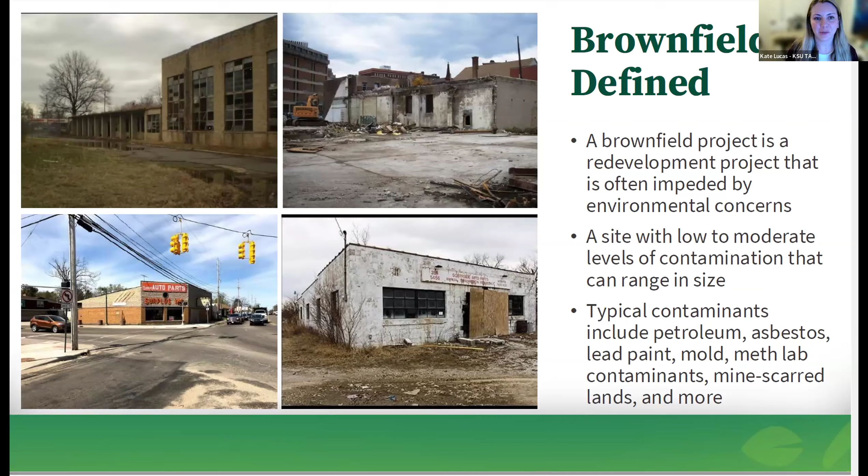So it's not a scary word. It's a word that really means there's potential for redevelopment and revitalization.

Okay, so just for the folks in the room or watching the recording who are not familiar with the project, we were asked to come and do some reuse visioning for the North Community Entrance Urban Renewal District, which was established a few years ago. It's 160 acres on the north end of Red Lodge. I'm sure you're all familiar.

This area was really identified as a focus area for the Urban Renewal District because it's a little bit underdeveloped, a little underutilized. There's a lot of businesses there that don't really provide an attractive and welcoming entrance to Red Lodge. The intent is to spruce it up a little bit and encourage redevelopment where feasible.

The 4 primary goals of the NCE URD, or as we may call it casually throughout this presentation, the URD, are to increase housing units near downtown, support business development, improve public infrastructure, and promote historic preservation and cohesive urban design identity.

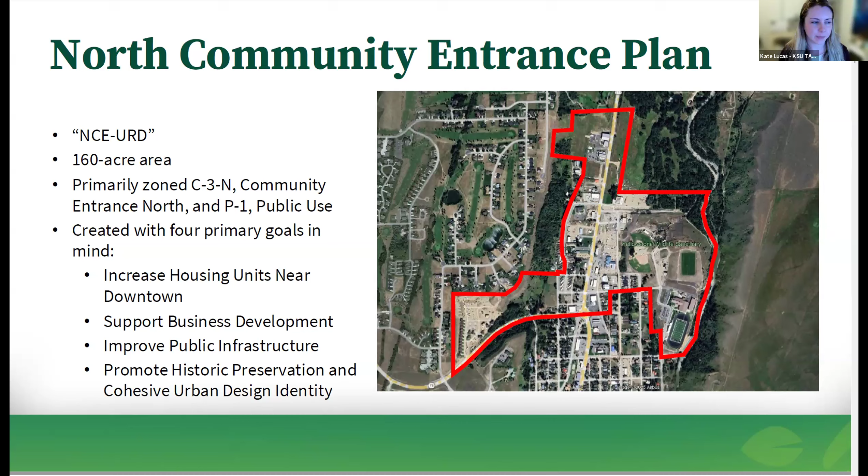Okay, so that's where we're working. Our scope of work is outlined here. We started out with some pretty robust community engagement, and I'll get into the results of that in a minute. We started out with an online survey that we published before we came and visited Red Lodge at the end of May.

Yes. Okay, great. So we came and did a site visit in Red Lodge at the end of May 2025, and we followed that up with what we called the Needs and Aspirations Survey.

And then we talked about doing some feedback on visioning. So far, we've not requested community-wide feedback in the form of a survey yet, but that is an option for us to do after we did this presentation here for City Council and the Planning Commission.

And the URA. So in addition to the community engagement, we also created a brownfields inventory and a site prioritization worksheet. Then Blake and a couple of his students worked on a package of redevelopment renderings that show potential for what could be developed within the URD, and he's going to go over those here in a minute. We also prepared a resource roadmap that identified different grant funding resources to help achieve the vision.

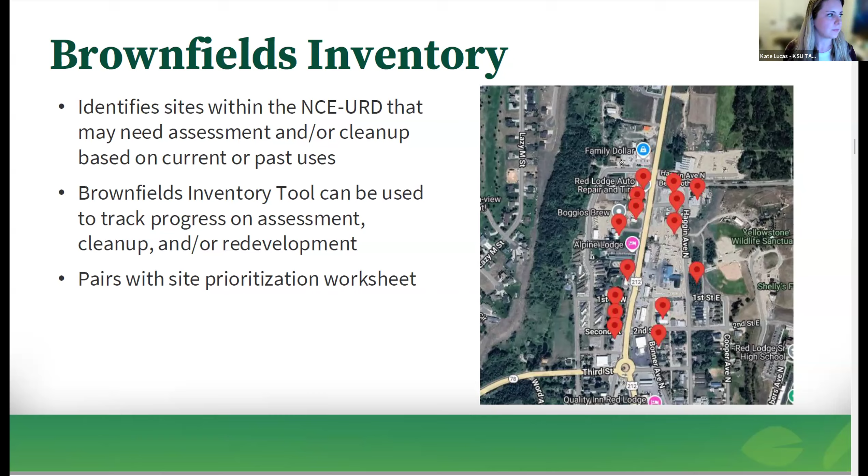In addition to the inventory, we just wrapped up the prioritization spreadsheet. This is available in the OneDrive link I sent out earlier today to the URA folks. I'm happy to share that again, and let me know if you have any issues accessing it.

This is a tool the URA can use to figure out which sites are best suited or highest priority for redevelopment. It's customizable—Maggie put together a sample—but theoretically, and in practice, certain sites end up with higher scores, indicating they're more ripe for redevelopment and could be pursued first.

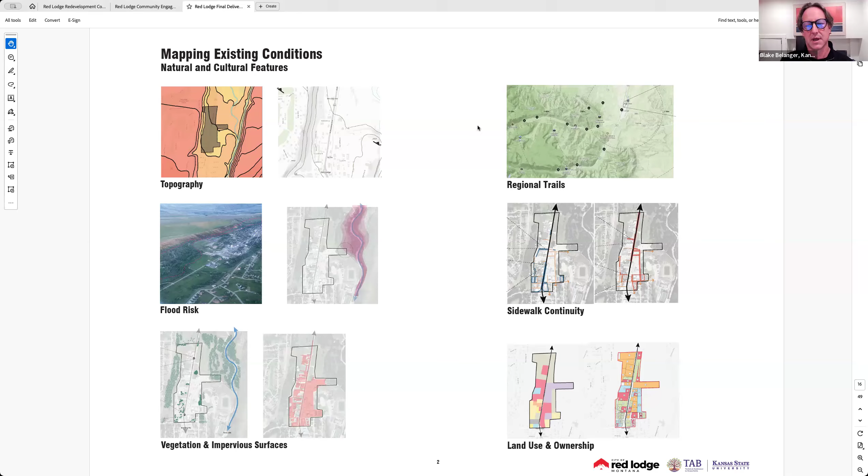From there, we identified with the URA areas that were the highest priority for redevelopment and other areas that were high potential for redevelopment. The criteria we used for that selection was city-owned property, so parcels already owned by the city, abandoned, vacant, or underused sites, industrial land uses, or parcels that are incongruent with the URD vision.

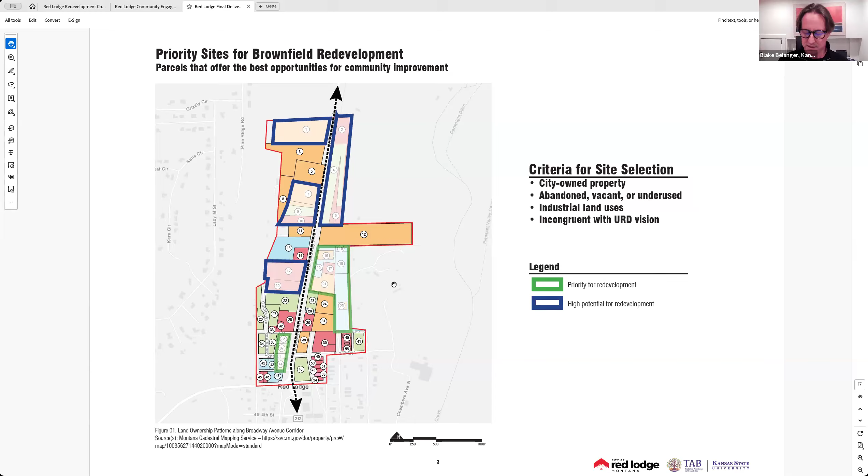And so we settled on actually 3 sites, 3 areas, the green areas as well as the blue. And from that, we moved into a slightly more nuanced site areas where we have 2 focus sites, the north site and the south site.

In this presentation, I'm going to start with the south site. It's less complicated and more straightforward. And then I'll go through the north site where there are 3 different options, and it's a more complicated set of conditions.

Throughout this presentation, there's a kind of dynamic that I'd like you all to keep in mind. When approaching urban design, it's important to begin with the concept of placemaking, which I'll talk about in a second. It's basically a people-centered approach to urban design.

In terms of the spatial dynamics of a site, there are 3 main components that need to be balanced: density, or amount of building space, number of housing units, the amount of development you're proposing; civic space or green space; and the circulation and parking required to support those uses. As one of those circles gets bigger, as you pick up more density, you need more parking, and those 2 conditions combined will shrink the green space.

If you want to increase the green space, then you have to shrink the parking, and that might affect how much density you can have. So at all times, when considering these 3 options, we were thinking about the dynamics of these 3 spatial considerations.

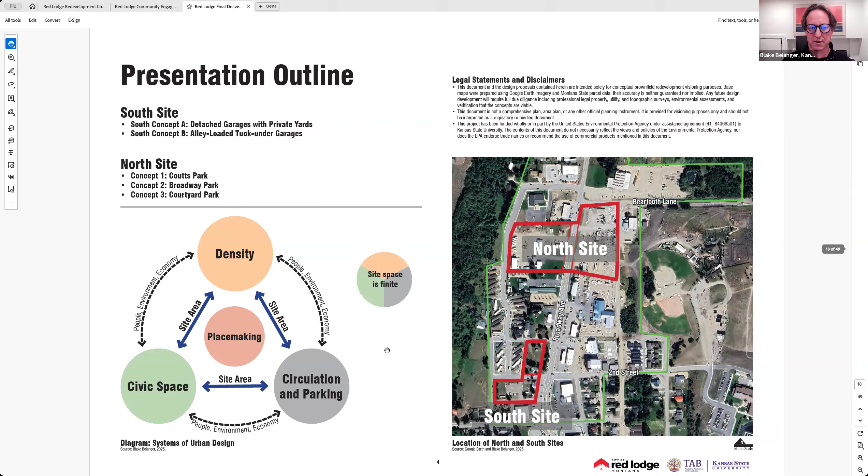So with all that in mind, placemaking strategies in Red Lodge—like I said, it's a people-centered approach to designing public space that really focuses on human comfort, sociability, creating vibrant places that are accessible to people.

It recognizes that the public realm or civic space is kind of the heart of communities, the heart of neighborhoods. And when I say public realm, I'm including things like streets, parks, plazas, squares, any place owned by the public where people can interact freely and go about their day.

There has been a focus on that in all of these concepts—these are not just concepts trying to maximize all of the development potential, but there's a consideration, there's a balance. There's density, but there's always going to be some consideration of the public realm and placemaking in this.

Some of the opportunities for placemaking that we identified, you can see on this slide. We thought the concrete batch plant tower was a very interesting structure that could potentially be reused as some kind of iconic feature or sculpture somewhere.

We noticed that when you're driving from the north into town, there's this really amazing view of Mount Maurice, that if buildings were on either side of Broadway, you'd be able to frame that view, and it could create this really memorable entry experience for people.

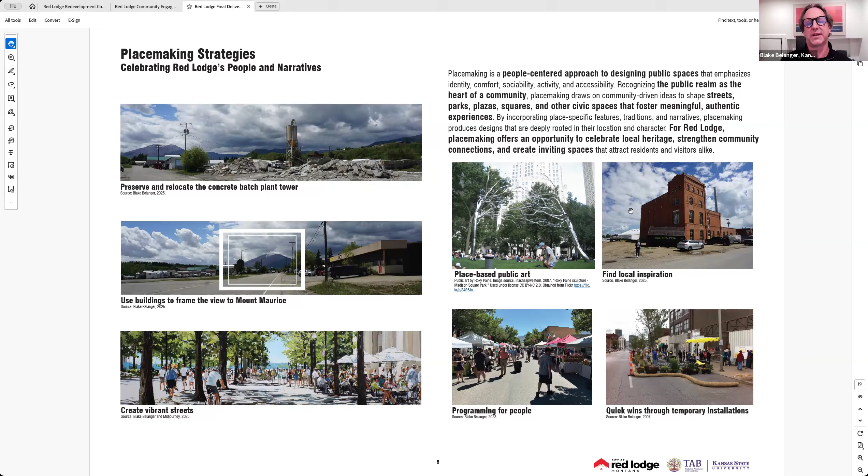Placemaking is also very successful when you can gain quick wins through temporary installations. You can have events with temporary pop-up tents, or put paint on the ground to start marking out where different activities will occur. That really generates a lot of momentum and gets people excited and interested.

So I'm going to start with the south site. You can see we're at the corner of 2nd and Broadway, and it's currently the site of a vacant house, an empty field with a shed. I'm sure all of you are familiar with where we are here.

Because of the size limitations of the site, I'll go back to this slide real quick. This area here has been identified as a likely location for a fire station expansion, so we didn't touch that, aside from showing the approximate size of a building that could fit in there.

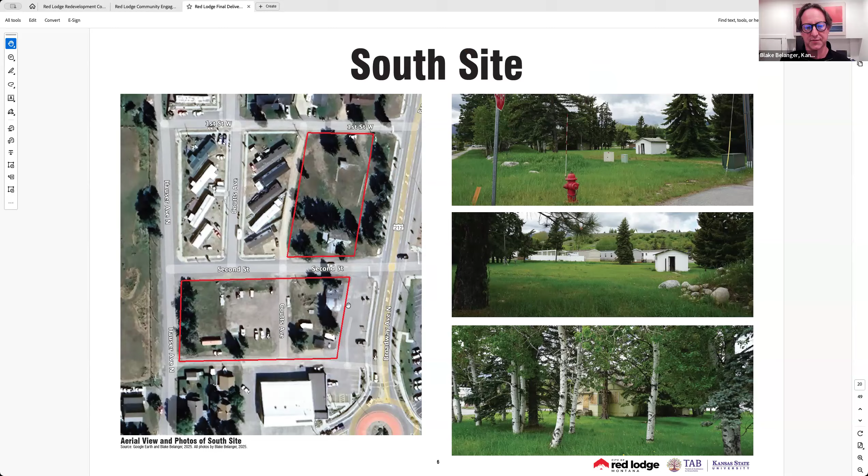So we focused on this northern piece of the south site. Because of the constraints of the size, it made the most sense to really focus on the housing need that the community has expressed.

We're proposing alley-loaded row houses. Row houses are single family homes attached at the wall, so each unit is owned by a single household. In this case, they face onto the street and their garages are in the back. In this image in the lower right, you can see each unit has its own garage. Cars drive in, park in the garage, and that keeps driveways off the street, so there's not a driveway interrupting the sidewalk, creating a more pedestrian friendly environment. It's also very convenient for the homeowners.

There's a second alternative to this, and that is the first concept. This is a lower density concept. It has 8 row homes facing onto Broadway Avenue behind that existing grove of aspens. Those trees are in the right of way of Broadway, so they can't be touched, which we think is actually a great thing because it creates a buffer between those housing units and the street.

Immediately behind the row houses there's a small backyard, and behind the backyard there's a detached garage. People will be able to park by driving down this existing alley, with the existing housing of the community immediately to the west. Vehicles can just drive down that existing alley and park in the garage, then walk through their little backyard and be in their home.

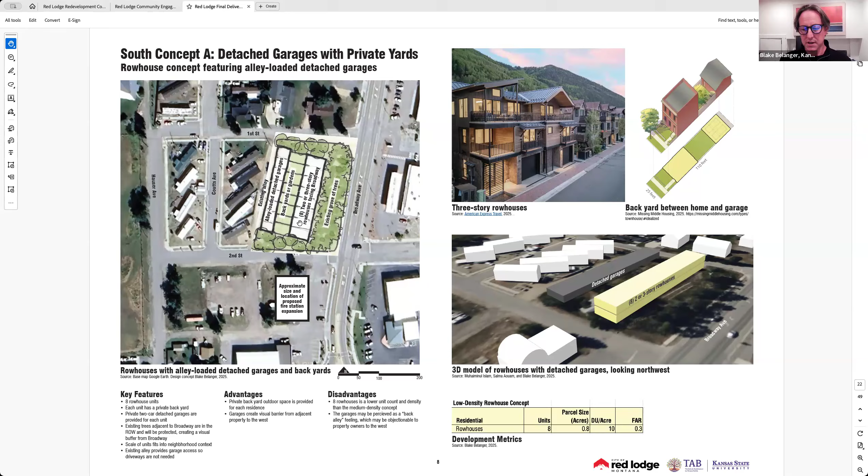It's 8 units. The second option is a little more than twice that number—18 units. This one has row houses in the same location, but instead of a little backyard, there's a new alley proposed immediately behind those. From here vehicles can drive and park in the back of either of these two rows of row homes. These row homes would look onto that existing alley or existing little street that the existing housing across the street sits on—so these folks would be looking at this housing, and these folks would be looking at the Aspens and Broadway Avenue.

This one would be really great for the community if the number of units is more important. So this one offers 18 single-family attached units.

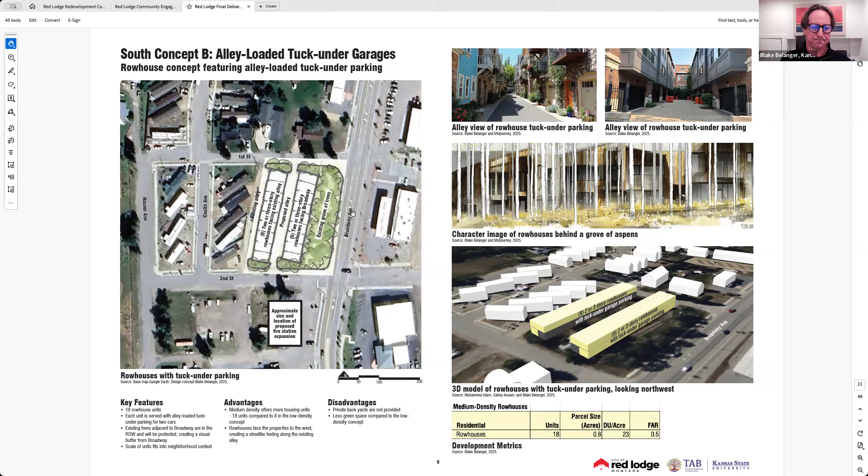So that's it for the south site. Really two options: an 8-unit with small backyards, or an 18-unit with tuck under garage parking.

So now I'm going to jump up to the north site, and the north site is really comprised of two pieces, on the west side of Broadway and the east side of Broadway.

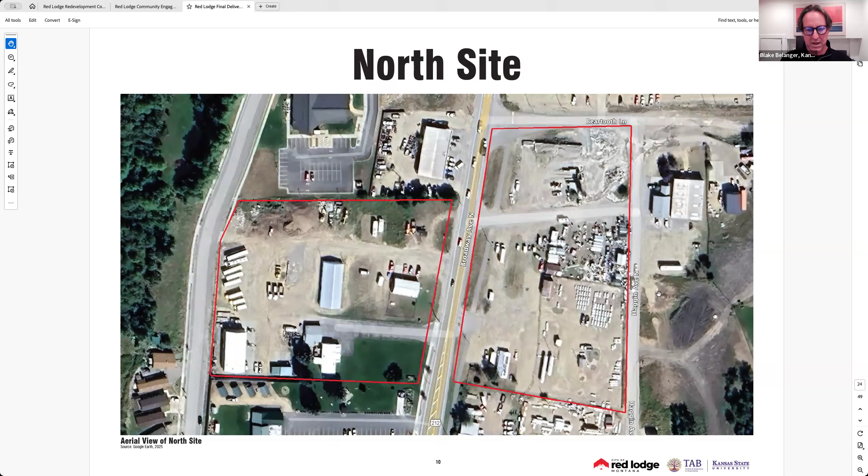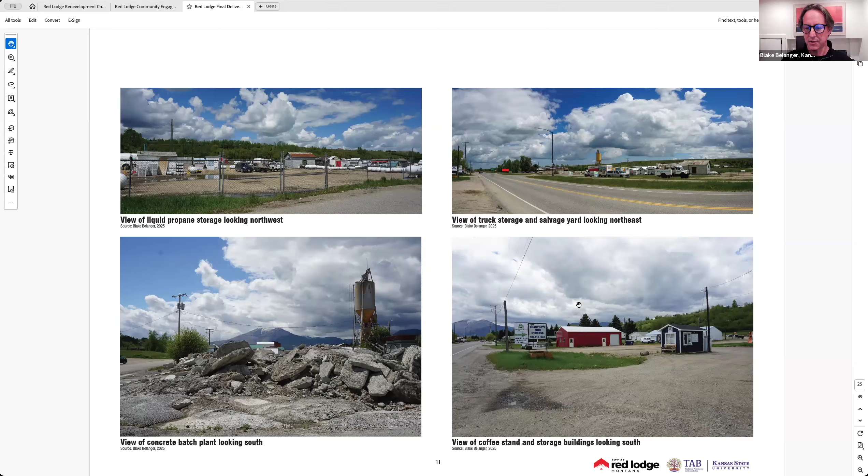And so you all know this area pretty well: the liquid propane storage area, the salvage yard, the concrete batch plant, and some other low density land uses.

In order to explain where these designs came from, it's important to describe the urban design analysis we did of this area. One of the first things we always look at when doing urban design projects is the existing street and block structure.

What we found in this area is that there are some very long stretches of street going north-south and east-west, and the grid is very fragmented.

You can see the proposal for all three concepts introduces new streets here: an east-west street in this location, an east-west street in this location that continues down to Haggin. So this one is Coutts to Broadway, Coutts to Broadway, and then Broadway to Haggin.

We're also proposing pedestrian crosswalks at each of those locations, recognizing that this is a state street and you'd have to deal with the DOT, which can sometimes be challenging. We do think it's appropriate in this location to try for that.

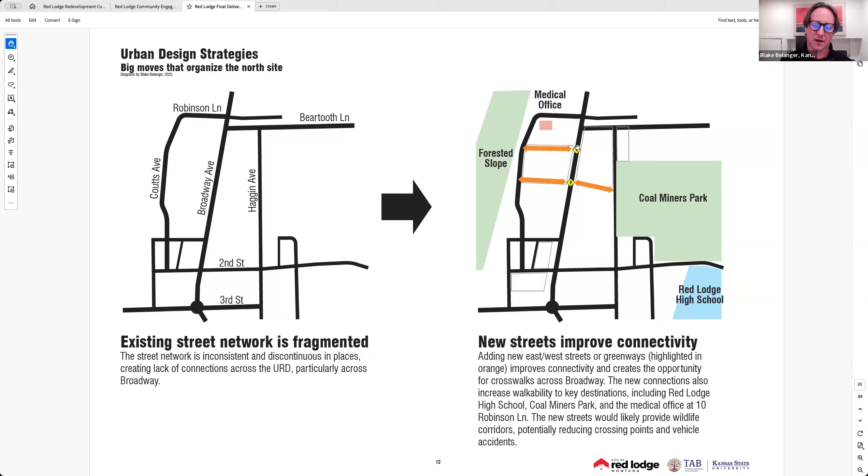It certainly addresses the desires of the community for walkability and connectivity, as well as trying to extend that feeling of downtown into the north area.

A related concern is that these blocks, when you look at their size, are very large. Large blocks are not as walkable, they're not as comfortable for pedestrians, and they don't create as amenable an environment. By adding these streets, we actually decrease the size of these blocks—the existing blocks are about 3 times the size of what you have downtown now.

By decreasing their size, they're more consistent with the urban fabric that the community has expressed that they prefer.

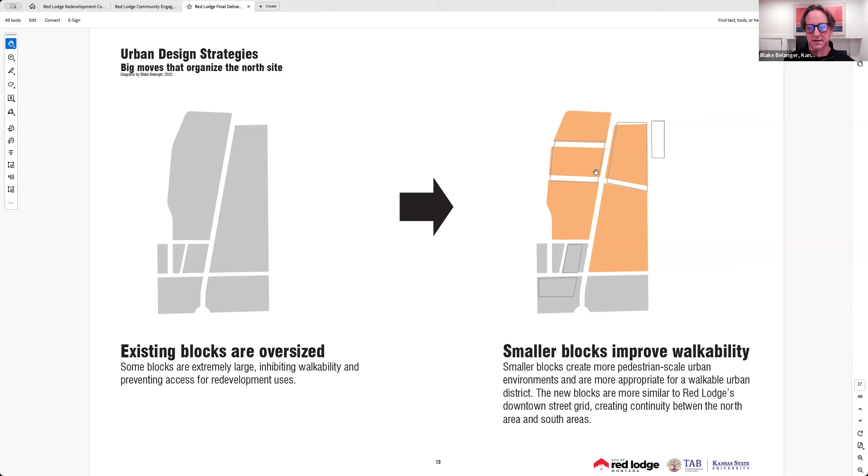The strategies we're using are aligned with the placemaking approach to urban design, which is to place mixed-use buildings along Broadway. A mixed-use building is a building that has activated storefronts at the ground level—shops, offices, retail of other kinds, restaurants, cafes—facing onto Broadway, and then 2 stories of residential above that.

Another important strategy is to hide the parking behind the buildings, so the parking lots won't be visible from Broadway as much as possible. There are some side streets where there is some visibility of the parking lot—certainly with the size of these parcels, it's impossible to completely wrap it.

So the main idea here is putting mixed use, vibrant activities right on Broadway to activate that street, putting residential on the side streets, and parking in the middle.

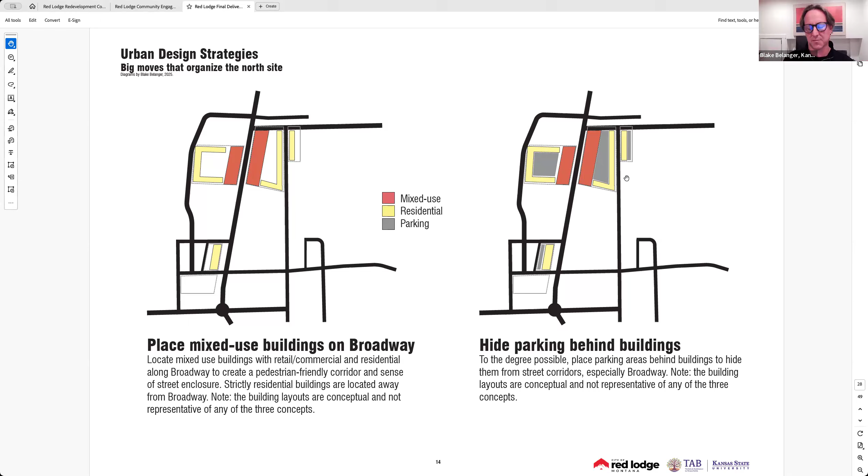I just want to point out these little diagrams are not exactly the concepts—these are just strategic approaches, a way of diagrammatically showing the ideas.

Another big move that came through loud and clear in the community engagement surveys and meetings was the importance of having green space in this redevelopment.

Looking at what's existing along Coutts, there's this forested slope, this greenway, and Coal Miners Park on the east side of our focus area. We thought it'd be really important to have some kind of green system that connects those two together.

Depending on the strategy, out of the 3 design concepts some of them are pure greenways and some are a mix of greenway and sidewalk along a street.

I'll get into that in more detail when I go through the concepts, but all the concepts also have some kind of park or combination of parks and plazas—some kind of civic space—in both the west block and the east block.

Lastly, all of the streets in this proposal are intended to be safe and comfortable pedestrian streets. Safe meaning they all have sidewalks, and comfortable meaning they have shade, are easy to get around, and have tree canopy.

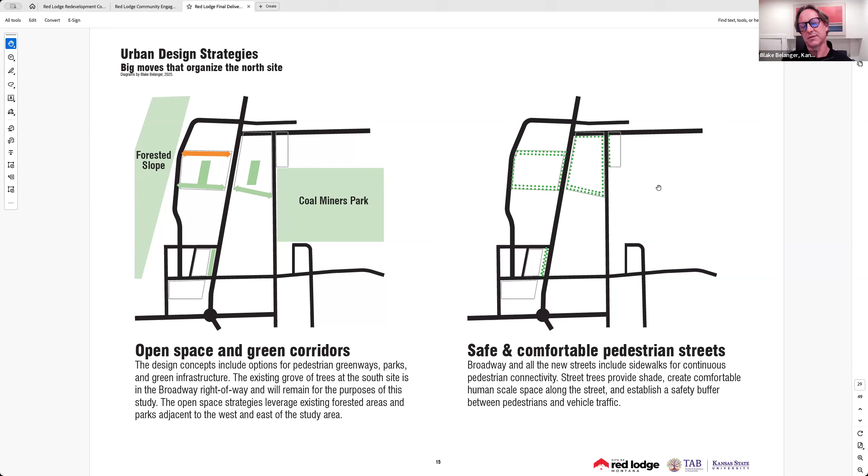With all of that in mind, we produced a series of character images of what Broadway could look like with that mixed-use building character.

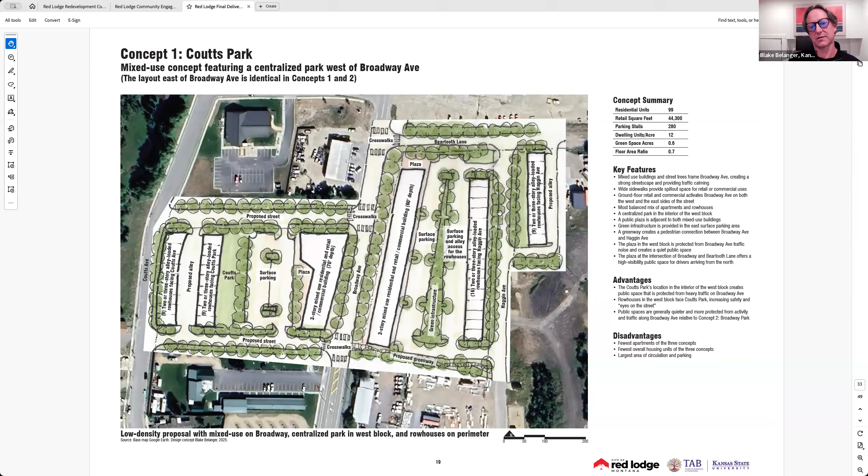Of the 3 concepts, this is the best for single family attached housing, and also the best for retail areas. It has the most row houses of all the concepts, but the lowest overall housing. This bar chart shows 99 total units for this concept, 43 of which are row houses and 56 apartments, so there's a pretty good balance, about half and half.

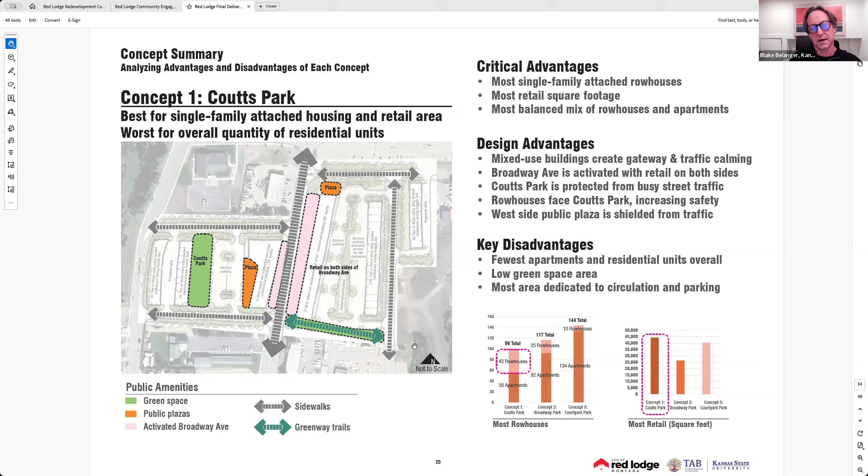The other big advantage of this concept is it has a lot of retail space, with both sides of Broadway having retail, edging out Concept 3 by just a little bit. But it has the fewest apartments overall, and is tied for last with the least amount of green space area. In terms of the greenway on the west side, it would essentially be a tree-lined sidewalk that pedestrians walk along, transitioning into a dedicated linear park, like a greenway, through this stretch.

Concept 2, Broadway Park, features a public park right on Broadway Avenue. As people drive in from the north, one of their first entry experiences will be this iconic park. This could be a place where public art is displayed, where there are places for people to be active, with picnicking, pavilions, and food trucks. This aligns especially well with the high school need for places to recreate and gather.

Behind Broadway Park is a 3-story apartment building. There's no retail on the west side of this concept. At the ground floor of this apartment building would be small patios for residents at ground floor to open up right onto the park, creating a pleasant interaction between the residences and the park, and also increasing safety.

Behind the apartments is a surface parking lot for residents. There's also a small plaza adjacent to the building serving residents with outdoor eating areas and shade. Then across Broadway is the same exact concept as concept 1: a mixed use building with active storefronts on the first floor, residents on floors 2 and 3, row houses, and then more row houses.

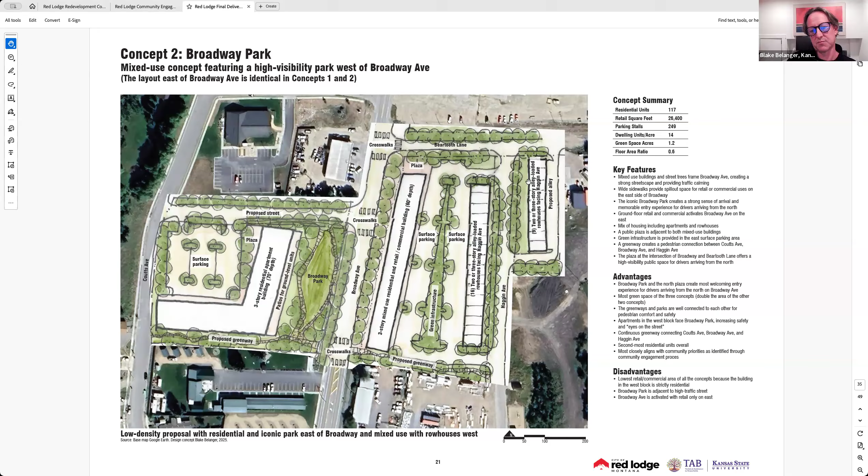This concept has the best balance of housing with green space. It has the most green space of all 3 concepts by double, so 2 times the amount of green space. It also has the best connectivity with the greenway system. The greenway goes all the way from Coutts to Haggin, and it connects directly, physically with Broadway Park.

The downside of this one is that it's the worst for retail. It has the least amount of retail square footage of all 3 concepts.

One potential disadvantage is that Broadway Park is adjacent to Broadway, which is at times a high volume street. So it would have to be designed in a way to make sure kids aren't able to get too close to the street. Traffic calming measures would be in place, so cars would be going a lot slower than they are now, but there's still a fairly high volume. Another disadvantage is that Broadway is only activated with retail on one side, the east side, this pink area.

But overall, this concept aligns best with the feedback we received from the community: a welcoming entrance, a mix of uses with housing, green space, and connectivity and trails.

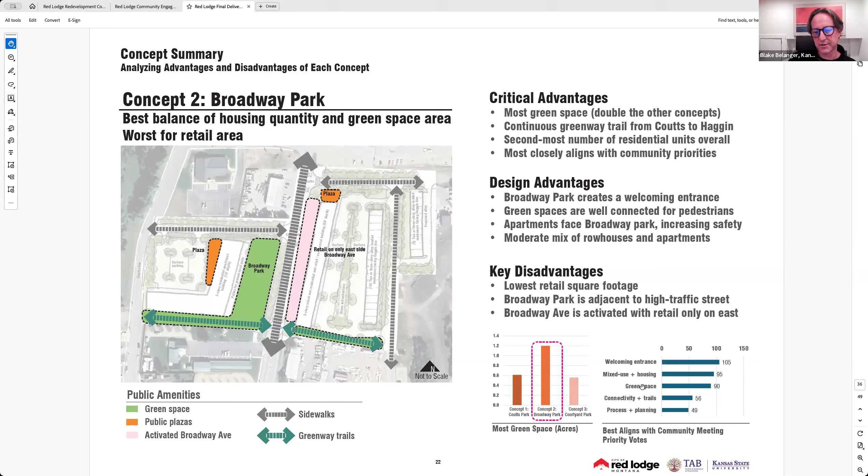The third concept is really the highest density. It has the most units, and it's mixed use along Broadway. It's apartments in the east-west wings of the building, going all the way to the ground floor, while the north-south wings on both sides are mixed use.

The large parking lots serve the buildings and are pretty well hidden from Broadway. One is visible from the proposed street, but it's adjacent to another parking lot.

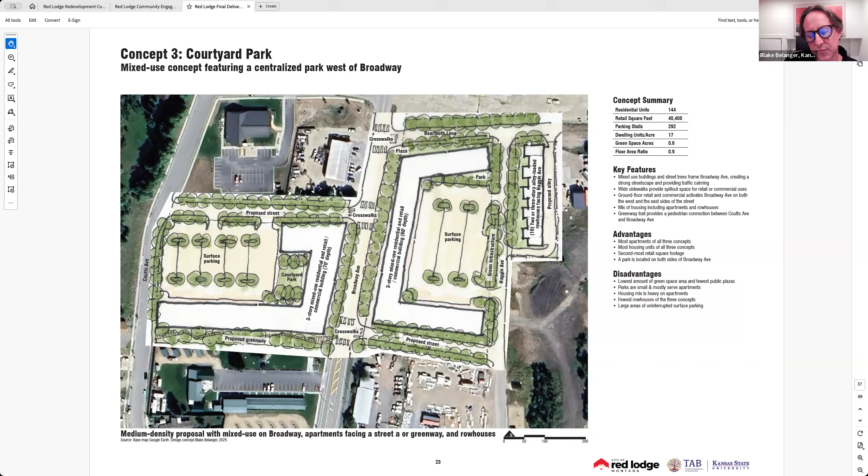The parks in this concept are smaller than the other concepts. Additively, they're about the same as the first one, but broken into 2 small ones. This one we're calling Courtyard Park, a small public park hugged by the building here. There's also a small triangle park on the east side, just south of the north wing. Then across Haggin, there are 10 row houses that face onto Haggin.

The key advantage of this one is it's the highest number of units: 144 total units versus 117 or 99. It also has the highest number of apartments, 134 apartments and only 10 row houses. Apartments can be beneficial if affordability is a high priority, so if the community is looking for ways to integrate affordable housing with market rate housing, this option could be attractive based on the pure number of apartments.

From a retail standpoint, it has the second most amount of retail space, by just a slim margin, almost the same amount as the first concept.

Some disadvantages are it has by far the fewest number of single-family row houses, and the least amount of green space and public plazas. The parks here are both pretty small, Courtyard Park and Triangle Park, and they're tucked up against the buildings. We anticipate those would be heavily used by apartment residents and maybe not as much by the general public, even though they could be public parks, since they're tucked away so close to the apartments.

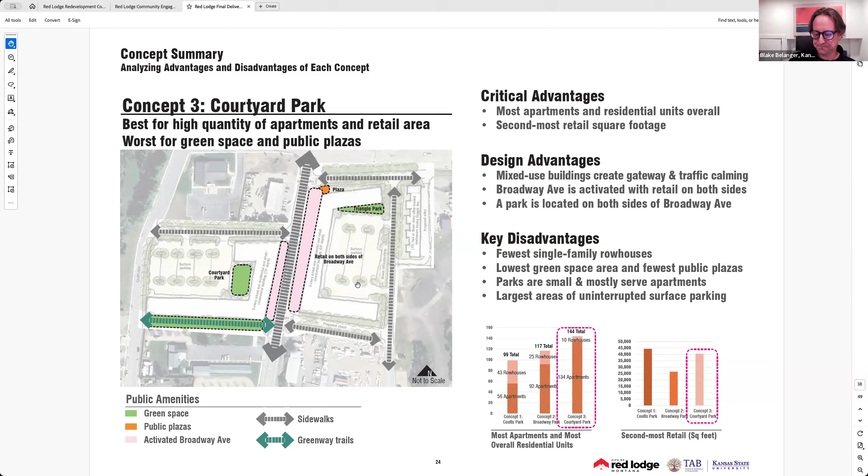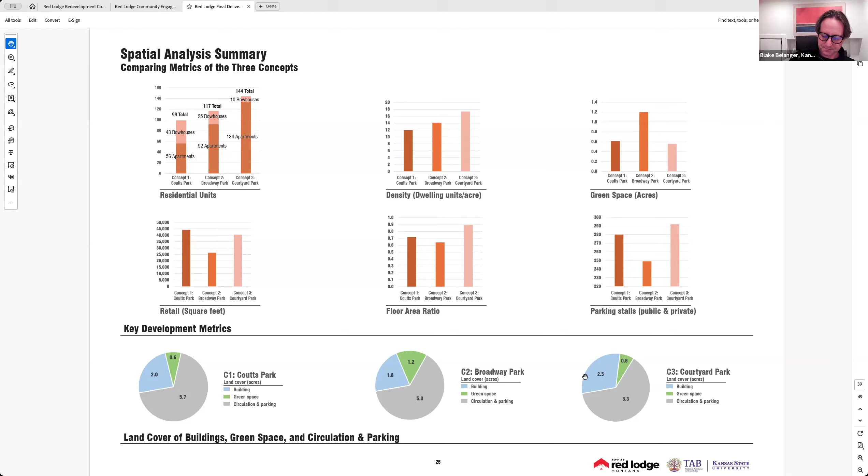So we are presenting these three different visions of possible development scenarios to you guys as a way for you to continue the dialogue, to think about the trade-offs in how you want to approach this development, and to really think about what's most important as you continue to prioritize and think about the future of the North Entry District.

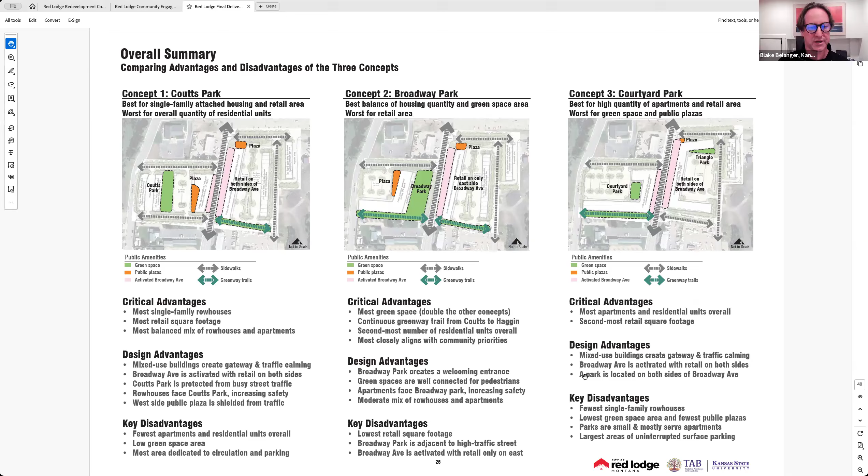Kate, yeah. Thanks, Blake. I only have a couple slides, so if you're okay with continuing to present, that might be easiest. Sure. Thank you. Yes, that was a great overview.

So switching gears into an overview of our final deliverable for this project, which is what we're calling the resource roadmap. This is a document that helps to outline the development process and identify sources of funding that can be used to achieve the vision established by the community.

We identified 8 different categories of funding need that were more or less related to those 6 priorities for redevelopment of this area, and identified over 50 different funding sources that can be used to implement the vision. We also provided a selection of those that we thought would be best suited to your project and your community, and a draft funding strategy that gives a brief overview of those resources and how they can be used.

Okay, so our next steps: we can schedule a demo of the brownfields inventory tool for you guys so you have an understanding of how it works and feel comfortable taking it on and managing it on your own. Of course, we're always here as a resource to help you manage that process, but we want you to be able to use this as much as you need to.